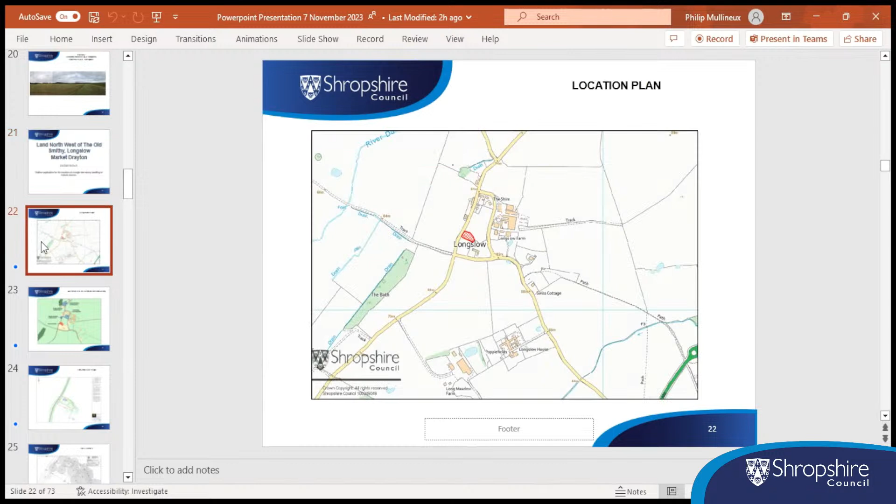Longslow forms part of a community cluster with Bletchley, Longford, and Moreton Say, and allows infill residential development on appropriate sites. Longslow does not have a settlement boundary, and officers considered the settlement is a loose-knit settlement which is centred around a looping road. This includes dwellings which are separated by small areas of agricultural land.

Members are required to consider the suitability of the site in context with the existing residential development within the settlement. I'd like to draw your attention to paragraph 6.16 of the committee report regarding the housing supply in the community cluster, which indicates a guide of 20 dwellings in the cluster. Longslow has gradually grown over the plan period since 2015 with an additional 7 dwellings. This application would provide 1 further dwelling.

Policy MD3 of the SAMDev plan does allow for an increase in housing supply, and paragraphs 6.17 and 6.18 outline the officer's consideration of the benefits this dwelling would provide. The site is within a sustainable settlement as defined by the NPPF.

Officers acknowledge the parish council concerns regarding the access and flooding. However, the submitted plans indicate a suitable access with appropriate visibility splays which can be achieved and will not lead to highway safety concerns. The council highway officers raised no objection subject to safeguarding conditions as indicated in paragraph 6.53 of the committee report.

Officers also acknowledge the parish council concerns regarding flooding, although the site is within flood zone 1, which is an area of low probability of flooding. A detailed topographical survey has been included with the application and indicates that the dwelling would be positioned on land 1 metre higher than the existing pond on site and 1.4 metres higher than the existing drain in the highway.

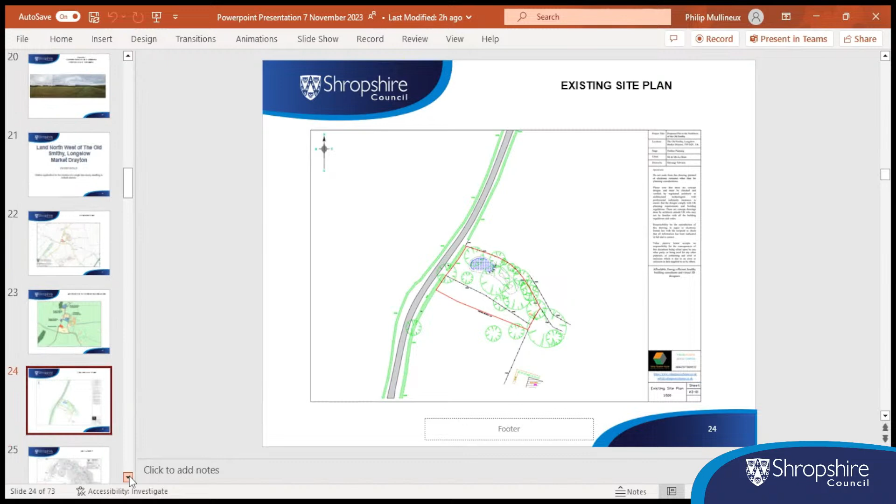This is from the tree survey showing the position of the trees within the site. Predominantly, there's a wide band to the north with less to the south.

This slide shows that the trees within the centre of the site and close to the access will be removed. The 2 Category B trees, which are close to the road, would be removed, and 3 Category C trees within the centre of the site.

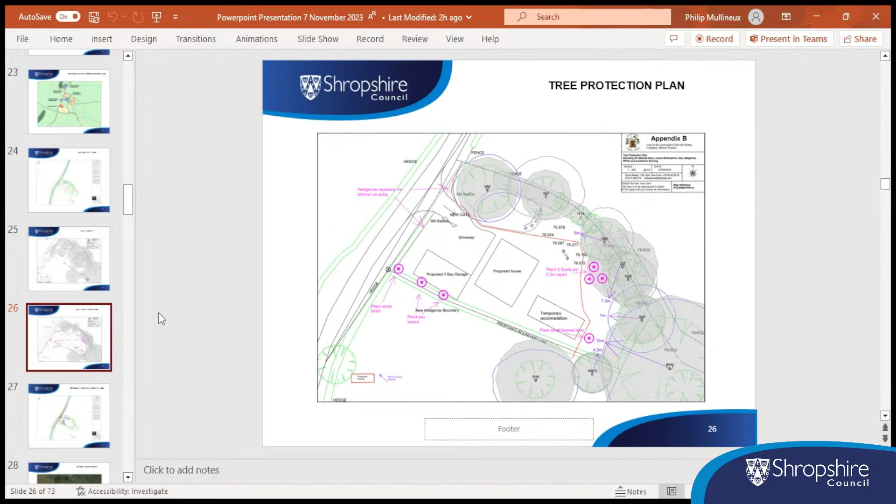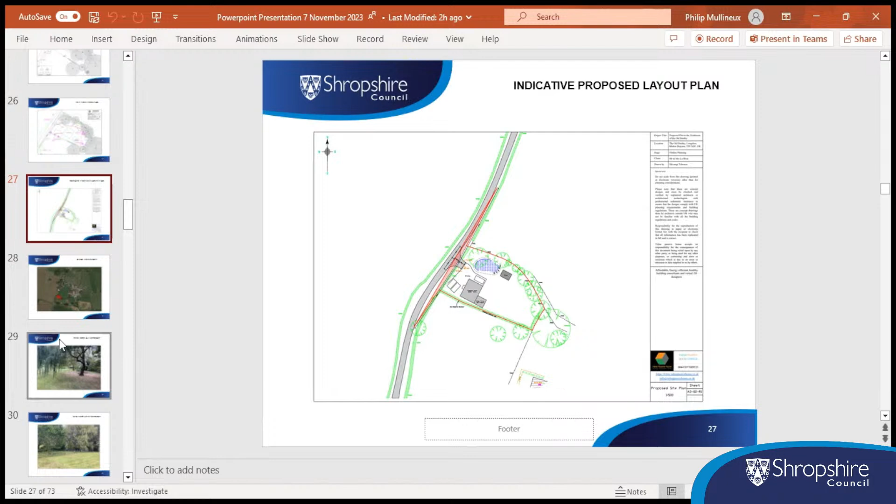Do we have any pictures of the listed building? Not on the slides, no. Might be useful? But anyway, there is a listed building.

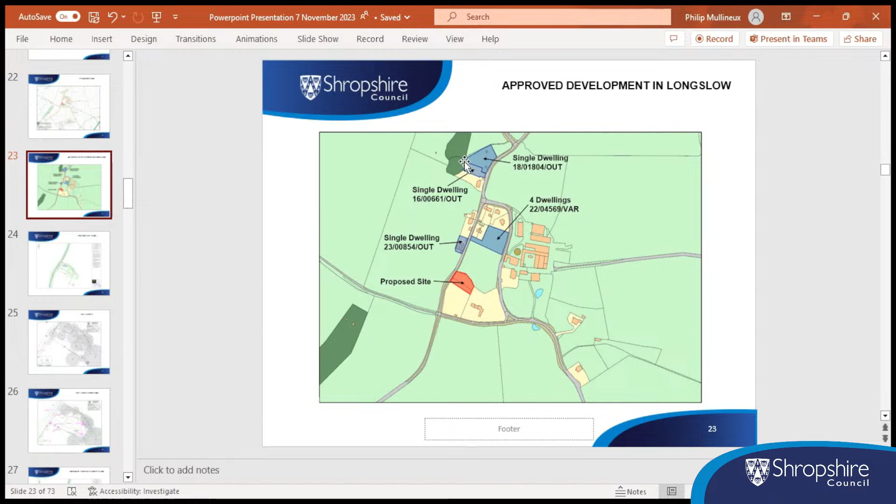When there are 39 places with applications to build, and the SAMDev quotes 20, that's almost 100% double of what is there. I haven't seen listed, I might have missed it, what the local plan says. I do note that it's a cluster in the upcoming local plan, but to have 100% already there, and obviously the parish council is not taking the view that no more in my area, I am in difficulty and I cannot support this at the moment. Thank you, Chairman.

Looking around the room. Councillor Burchett: I'm going to propose we accept the officer's recommendation.

I would suggest something along the lines of the culvert is cleaned prior to any development progressing and is maintained in a clean condition for whatever period of time we can enforce it. I'm not sure we can put in a condition that gets it maintained forever. At least get a clean start with it. But I would agree that perhaps we could get one that the building can't commence until the culvert has been cleaned, to ensure the site doesn't become a horrible sticky mess.

It does actually say that at 6.81 on the drainage. It's recommended that both the foul and surface water drainage are conditioned accordingly, for details to be submitted and approved prior. It does indeed say that, but it's not a condition. We're looking into it. Yeah, but we could just adopt that and put that as a condition, surely.

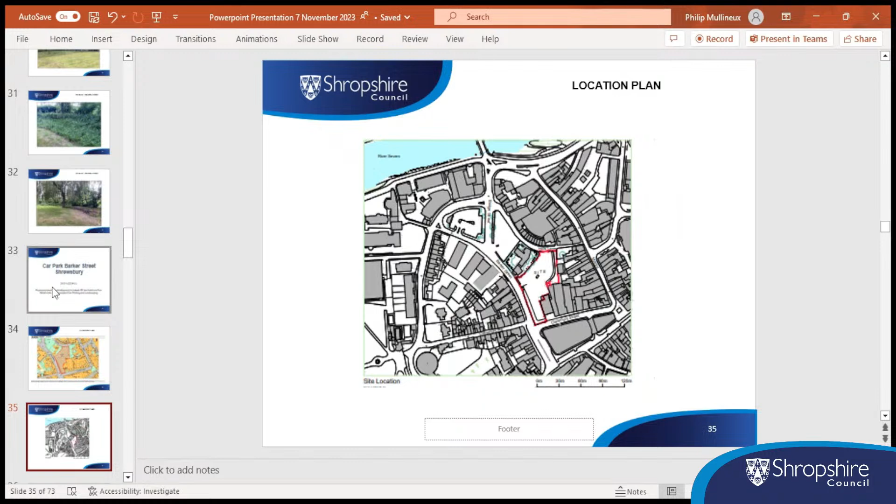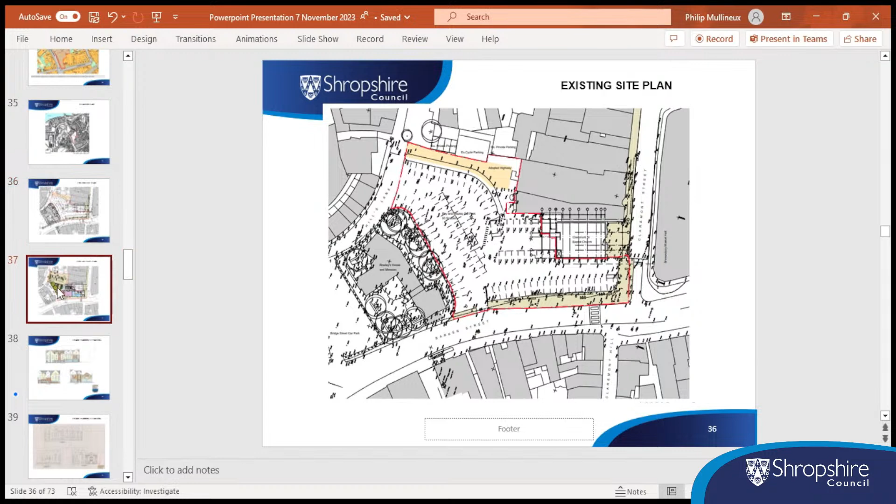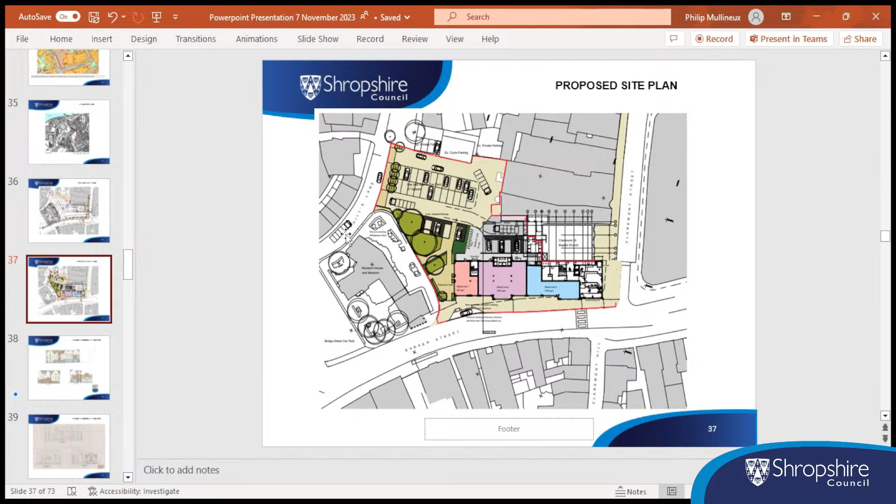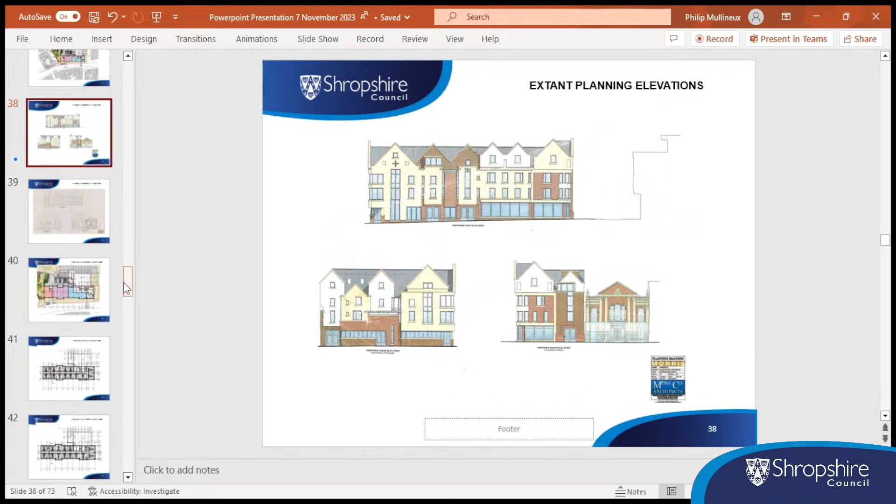This slide shows an existing extant planning permission for the site, which technically could be built out, and I thought it was interesting to bring this up to show you in relationship to what's proposed. You'll notice the paneling, white paneling, quite different in finished construction materials to what's proposed under this current application. That plan is part of the planning committee report on the extant planning permission.

Right, the proposed ground floor. There's 3 retail units alongside Barker Street here, and above, the next floors are hotel accommodation, up to the 3rd and 4th floors.

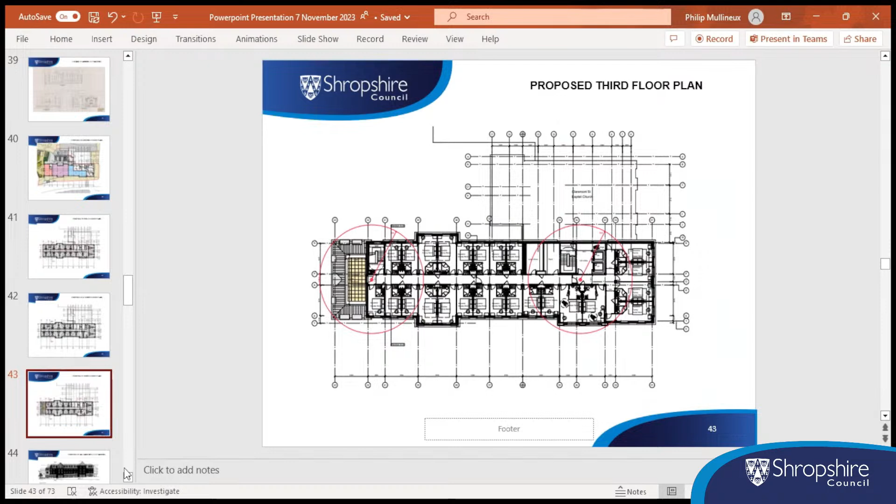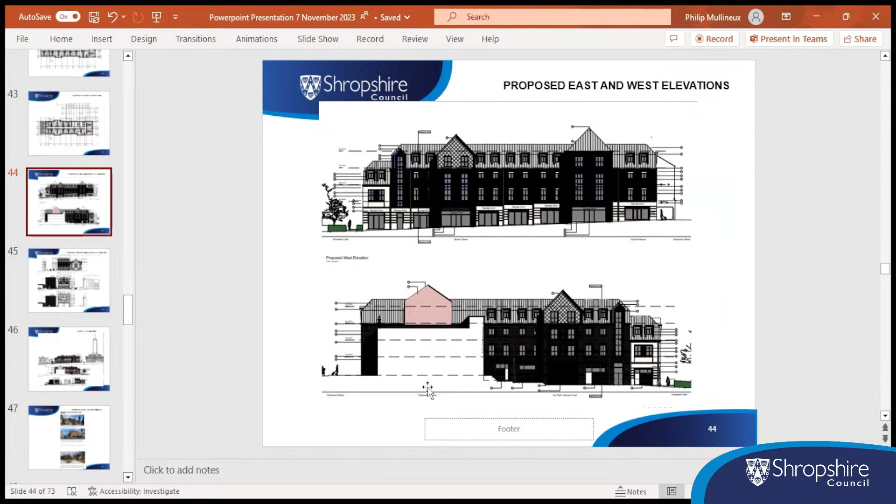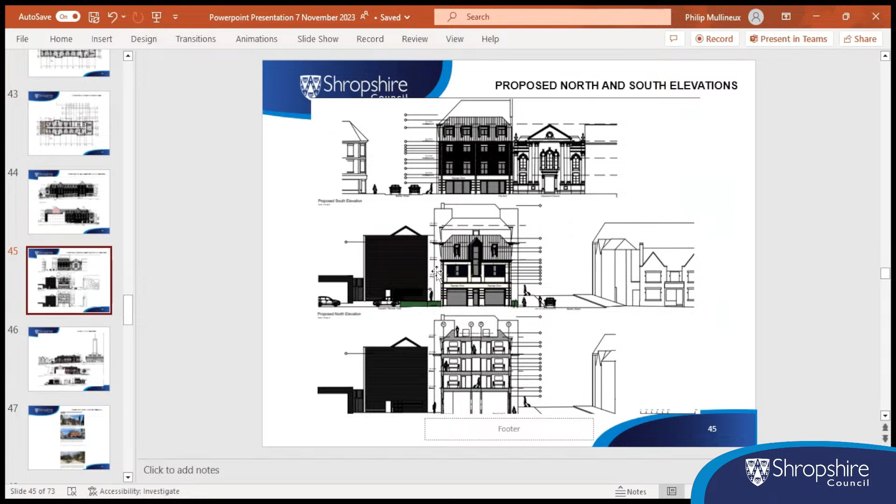Proposed east and west elevations. This one faces onto Barker Street, this is the rear. Side elevations - Claremont Chapel here, that's the side alongside it. And this is the south elevation.

Street elevations. Now coming on to some photographs of it, or what it'll look like in the surrounding street scene. I've got some marking up here - these are taken out of the applicant's design and access statement. Another street scene.

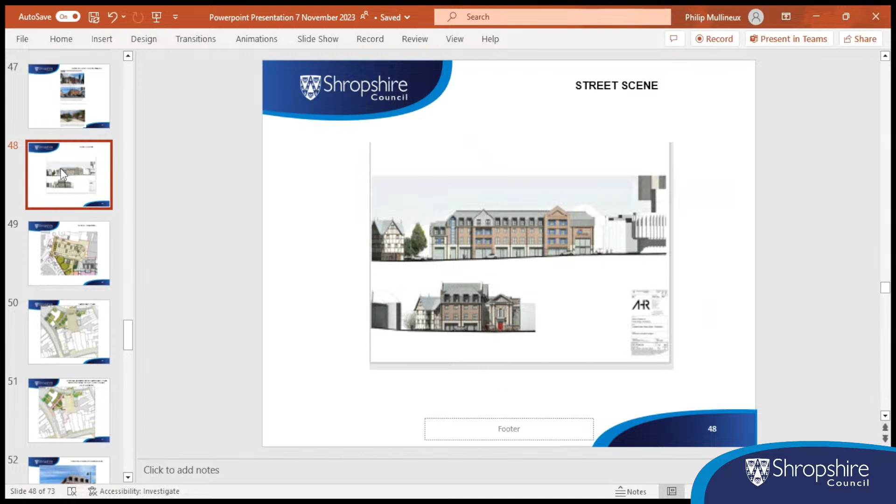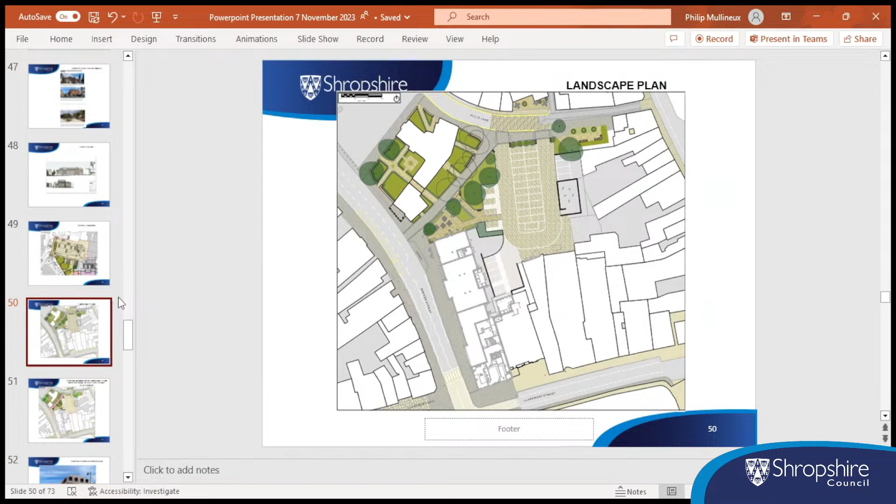As I indicated earlier, the application also includes landscape enhancement between the site and Rowley's house and mansion. I've got some photographs showing the existing trees for those of you concerned about those. This one indicates proposed landscaping, which would be subject to Section 106 as outlined in the report. Further landscaping shown here.

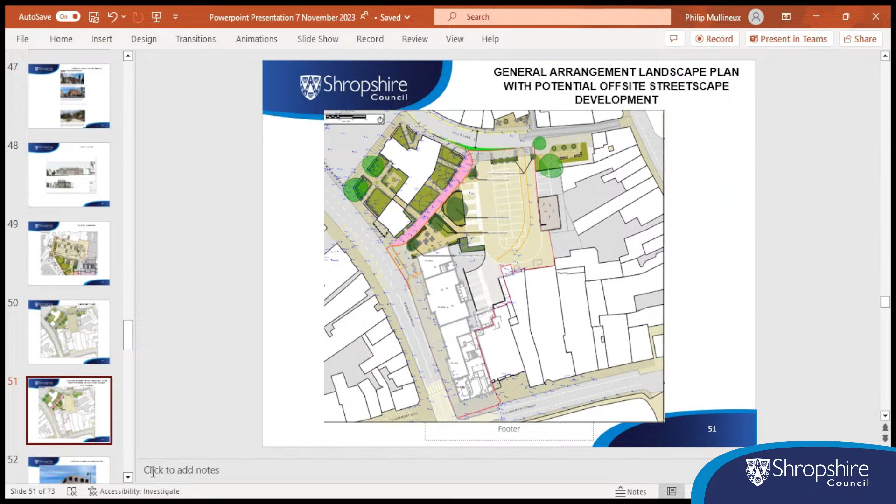Now, these are the indicative plans, which I think will be very helpful showing the proposal and how it is envisaged it will look. You can see in the foreground on the north side, Rowley's house. This is looking down from the junction of Claremont Street, which is here, and you'll see the chapel up there on the side. That's a view looking onto Foregate Street.

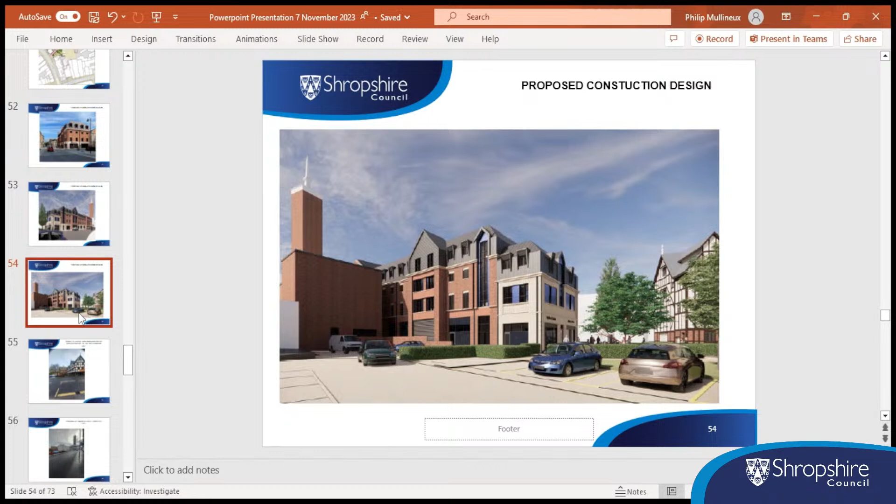I wanted to go onto the south elevation because that wasn't very clear in my earlier presentation, but you'll see it there behind the tree, because it's dropped down into 3 stories with consideration to the setting of Rowley's house. And then again, a better view with the landscaping. That is Rowley's house, situated on the northern edge.

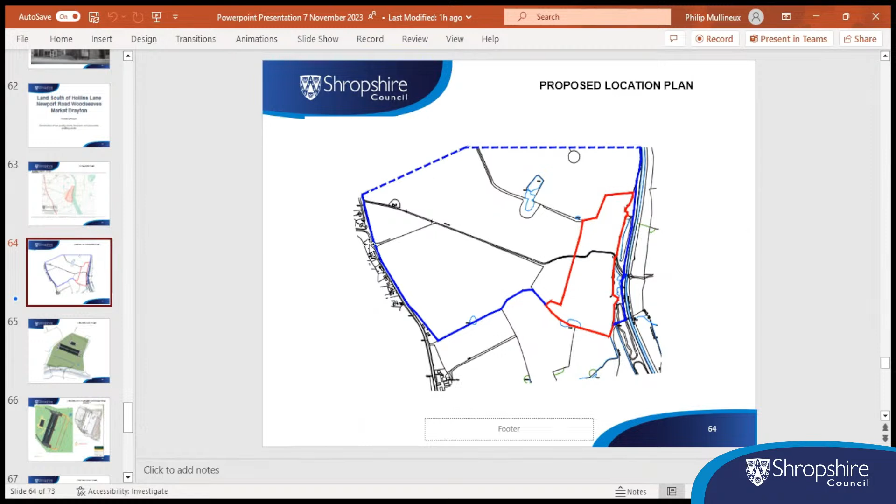This is a plan showing the site and the applicant's ownership, or part of it, in blue. Next one. This is the proposed site plan with the existing site plan with existing sheds. The proposed ones will be to the bottom of that plan, but that plan isn't showing north upwards. Next one.

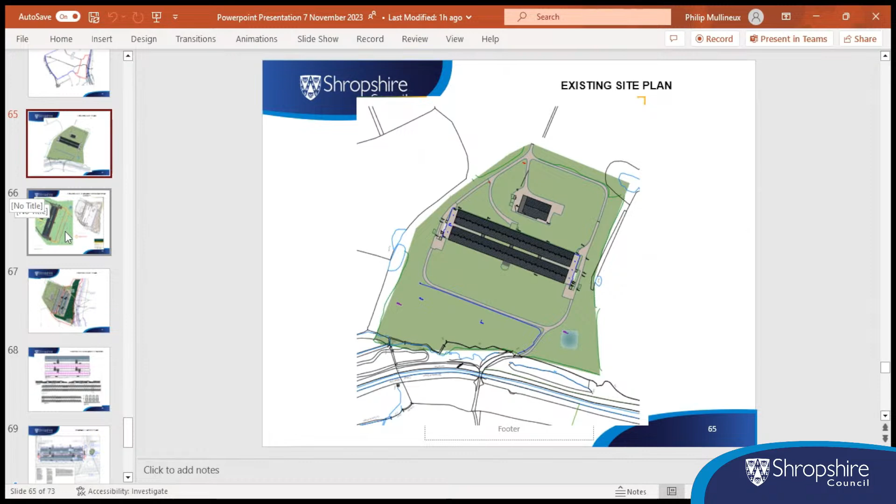This is the proposed site plan. You can see where the proposed sheds would go, just to the east of the proposed sheds, to the east of the existing ones, and the biomass boiler to the west. So the new sheds will be in line with and identical to in scale and design as the existing sheds.

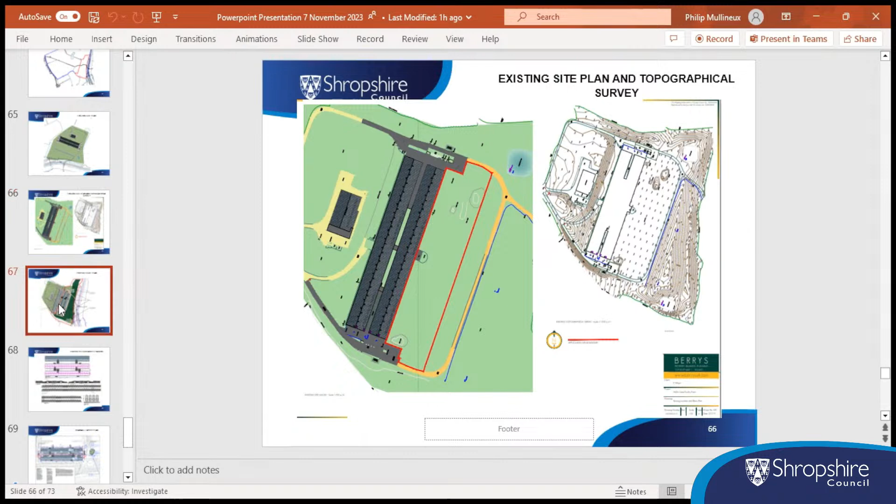This proposed site plan in a bit more detail, showing the area of tree planting in dark green to the east, northeast and south, wrapping around, and the 2 ponds as well in blue. And then you can see the canal cutting to the east. This one.

This is the floor plans and elevations. The buildings will be of a fairly standard design. The 2 buildings would actually be equivalent to 4 normal sized poultry buildings. They're just linked together as 2 buildings. And you can see the proposed elevations of the feed bins to the bottom right of the plan there. Next one.

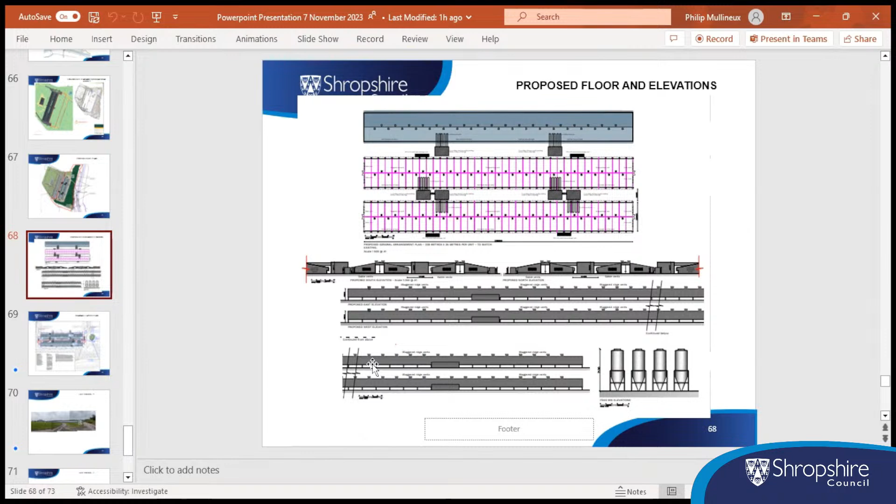This shows the proposed drainage layout plan, which includes a series of drainage channels and underground tanks and a surface water scheme, which links into a pond, which would then link into a channel, which would go towards a watercourse to the east.

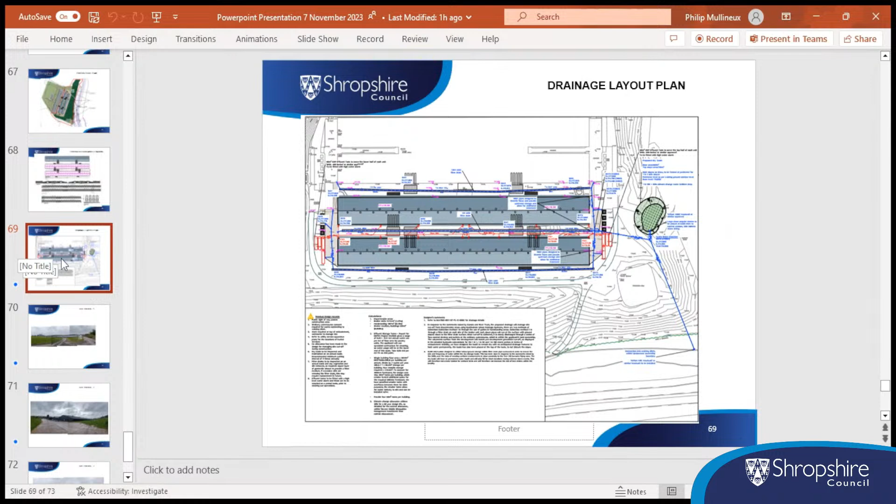So in terms of matters to be raised, you will have seen the additional representation received on the sheet which was circulated yesterday. We've also had an additional comment from the Sutton upon Tern Parish Council as well, who reaffirmed their objections to the proposal with concern about the doubling of the number of poultry units, which they say would have an overwhelming environmental impact.

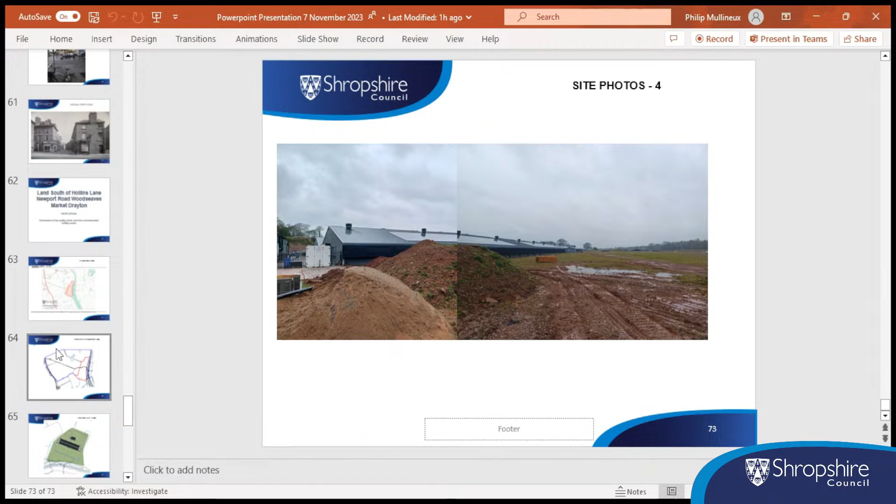In terms of ammonia emissions, it's proposed that air scrubber units will be fitted to the new sheds and also 2 of the existing ones, and that would result in a significant reduction in overall ammonia emissions.

There would also be mitigation, which would include the manure arising from the proposal not being spread on the land, but taken to an anaerobic digester.

Additional mitigation would be the planting up of woodland, as shown on the plans, to capture ammonia.

The main issue with the application is one of the potential impacts of odour emissions. The expanded operation would increase odour levels arising from the proposed operation.

The application is supported by a detailed odour impact assessment, which has modelled the likely total odour levels of the existing sheds and those proposed additional ones.

You will note from the report that there have been numerous odour complaints made in relation to the current operation, and the Environment Agency has said that they have investigated these on a small number of occasions, and they have not been able to substantiate any of the complaints.

The applicant's odour consultant and an odour consultant employed by a group of residents disagree between themselves on the adequacy of the submitted odour impact assessment.

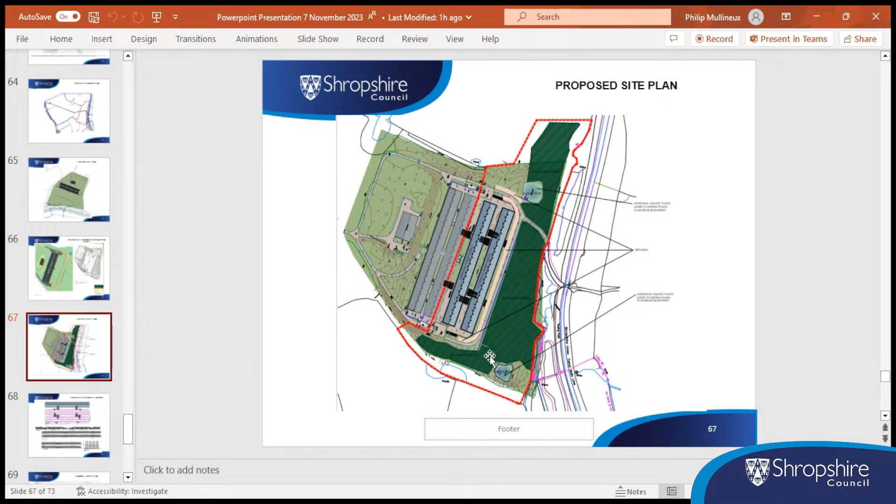As in my report, I was happy with a lot of the information provided, and it wasn't until that late stage that the odour report came in from that consultant, who raised very valid comments of a fairly technical nature, which we had to deal with in a very short turnaround time. In my opinion, it has identified an omission with the odour impact assessment, which, given the number of complaints we've received, we cannot ignore. There might be nothing to any of these complaints, but until we've properly considered them, I think it's right that we make sure the odour assessment is fully comprehensive and deals with that matter.

The reason why, as the agent mentioned, a letter went out saying approval and then later saying refusal, was merely an administrative error. On our system, the original recommendation was for approval. In the haste to get the report out, that wasn't updated, so the letters went out with approval. However, I explained that to the agent, and I also explained that to the parish council on that day, so I don't think anybody was particularly inconvenienced by it.